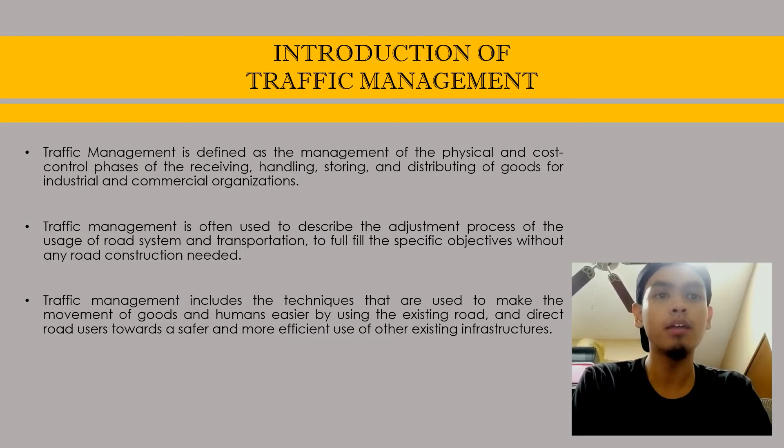Do you know what a road accident is? A road accident is a tragedy that affects all people, whether as drivers, passengers, or pedestrians. The term accident, according to Dewan Bahasa dan Pustaka, means an unexpected event occurs. The accident rate in Malaysia is increasing and disturbing our society today. Road accidents occur in many places, whether straight roads, crossroads, traffic lights, or roundabouts, and happen daily, causing minor injuries or casualties.

Usually there are three factors causing road accidents. The first is human factors: vision, hearing, comfort, fatigue, and emotional state of drivers. Number two, hasty attitude and selfishness. Number three, driving while intoxicated, unwell, or sleepy. Number four, interference with driver attention. And the last one is pedestrians not obeying traffic rules.

The second is vehicle factors: vehicle defects, including electronic functions, faulty tires, and brakes. Number two, capacity against skidding. And number three, acceleration and deceleration of the vehicle.

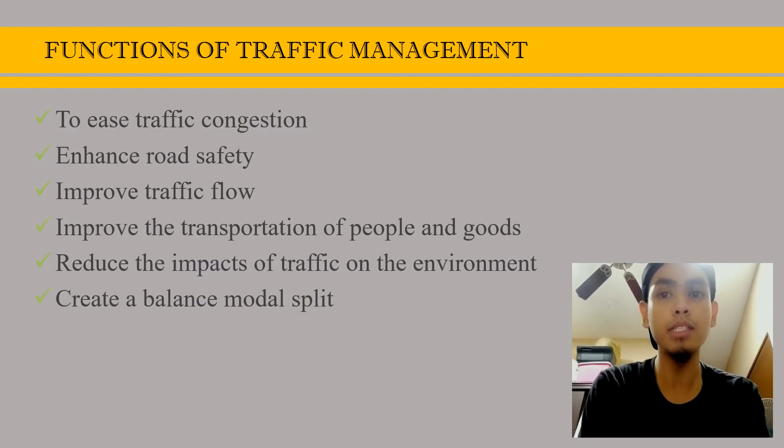Next, the functions of traffic management: to ease traffic congestion; number two, enhance road safety; number three, improve traffic flow; number four, improve the transportation of people and goods; number five, reduce the impacts of traffic on the environment; and number six, create a balanced modal split.

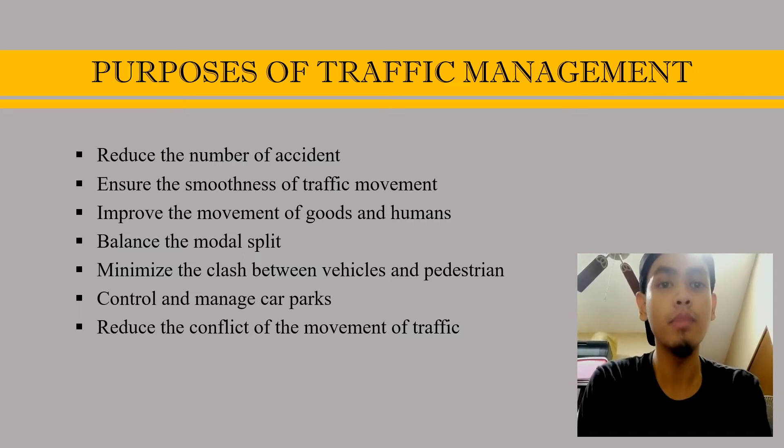Next, the purpose of traffic management: to reduce the number of accidents; number two, ensure smoothness of traffic movement; number three, improve the movement of goods and humans; number four, balance the modal split; number five, minimize clashes between vehicles and pedestrians; number six, control and manage car parks; and the last one, reduce conflict in the movement of traffic.

Next is traffic management physical management of the road system. There are 12 physical management methods for the road system. The first is separation of traffic movement. Number two, junction improvement. Number three, geometry of local area improvement. Number four, physical detention of traffic movement. Number five, changing of level, surface texture, and alignment for speed control purposes.

Number six, introduce the coordination of phased traffic control. Number seven, modification of traffic signs and road signs. Number eight, provision of public transport facilities. Number nine, provision of facilities for pedestrians and cyclists. Number ten, modification of landscape and road tools. Number eleven, car park control. And the last one is metering ramps.

I will highlight the last two. The first is car park control: car parks are always highly charged to reduce the number of vehicles entering the urban area. Number two, the volume of traffic in the urban area can be reduced. Number three, a balance between the demand to park cars and the ability to provide car parks must be created.

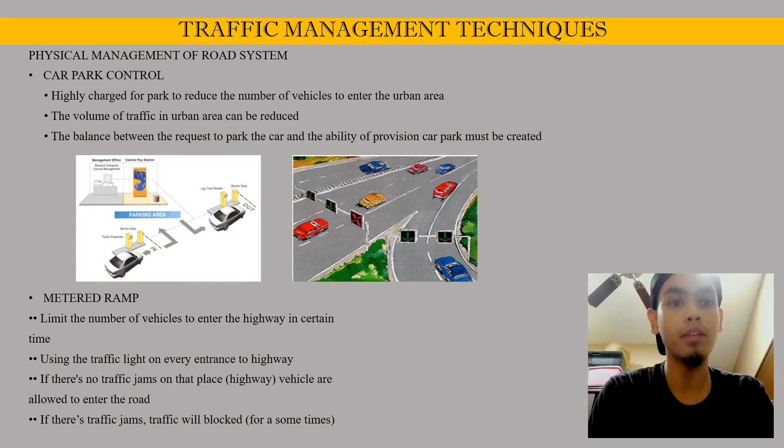Let's go to the next one. The next one is about instruction forms and traffic regulation management. There are many instruction forms and traffic regulation management.

There are 6. The first one is traffic control. Number 2, turning movement barriers. Number 3, one-way street. Number 4, limiting vehicle speed. Number 5, tidal flow method. And number 6, road marking.

The first one, traffic control. Control using a traffic light at the intersection. Number 2, limiting the use of the road to certain vehicle types according to weight criteria, speed, and size of the vehicle. Number 3, limiting and controlling parking. Number 4, temporary regulations due to festivals, sports, and other events. The last one: regulation without strict enforcement will not achieve effective traffic management.

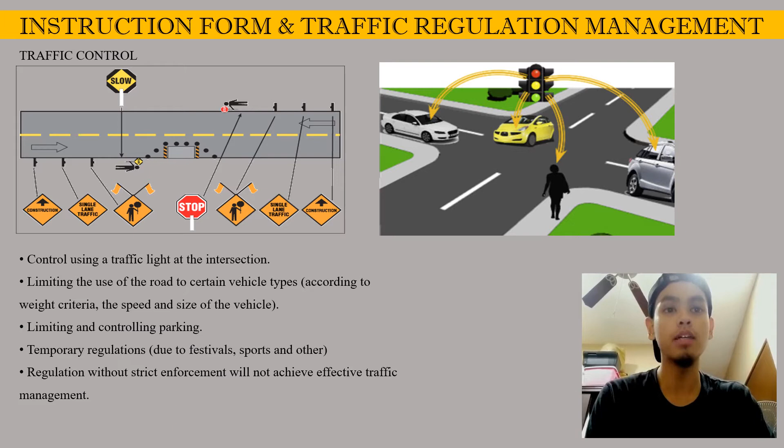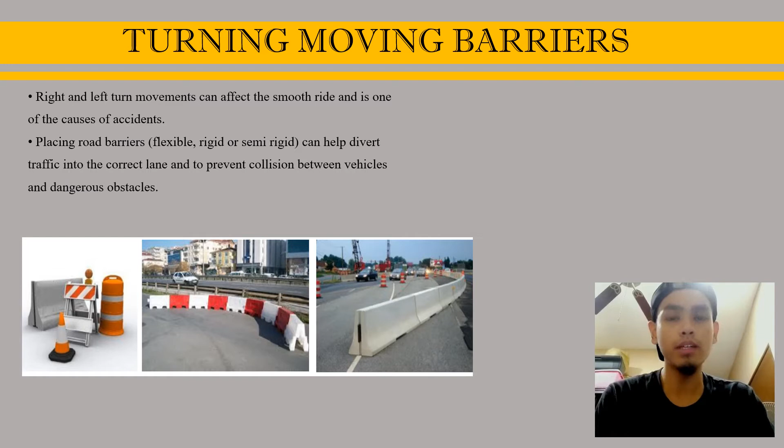The next one is about turning movement barriers. Right and left turn movements can affect smooth traffic flow and are one of the causes of accidents. Number 2, placing road barriers can help divert traffic into the correct lane and prevent collisions between vehicles and dangerous obstacles. And the technique of one-way streets.

From the one-way street, we can improve traffic flow around the city, especially when the road network in the area has a network of roads that cut parallel to each other at right angles. This technique can increase the capacity of one-way streets, every road in the road network, and reduce the range of change in flow at the intersection. By converting a two-way road to a one-way path, conflict points will substantially reduce.

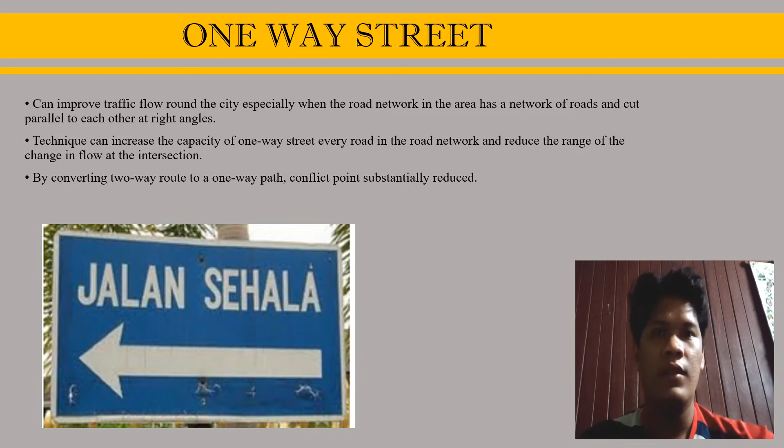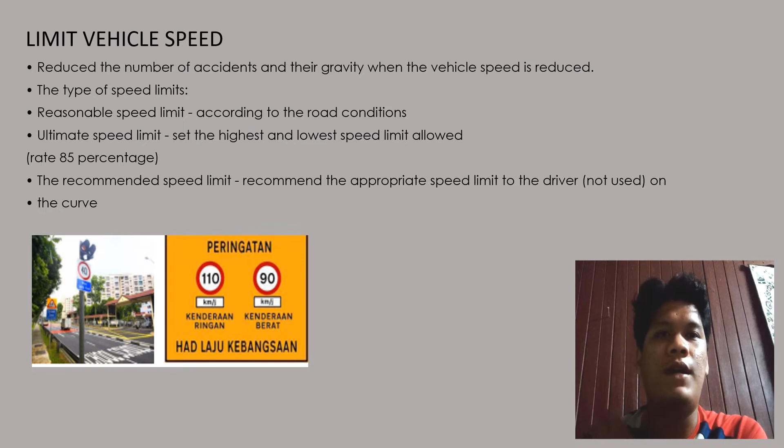So we can see the picture board warning about limit vehicle speed, like 110 km per hour or 90 km per hour.

The tidal flow method: cities experience regular morning and evening rush during working days, increasing the usage of private vehicles traveling back and forth to work. This causes underutilization during off-peak hours and over-utilization during peak hours in relation to the width of the road. The tidal flow method, or TFM, is a traffic control method which opens and closes lanes on a roadway according to the priority of traffic direction.

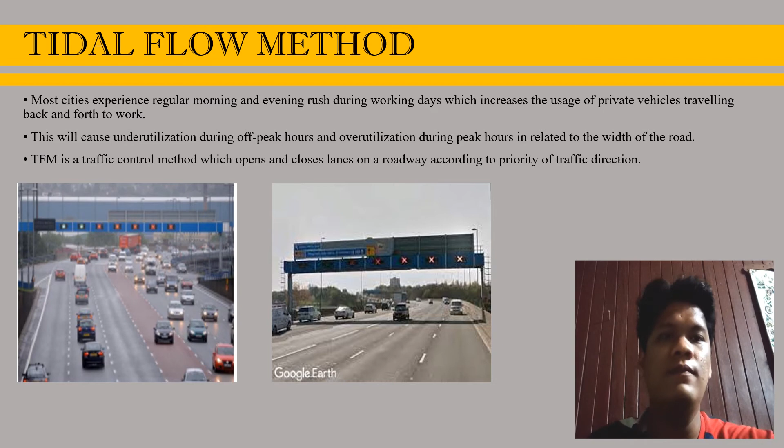Traffic marking is an object or device, whether fixed or movable, or lines or marks on the road. This notation is used to provide information, requirements, restrictions, or prohibitions on road users. It includes street signs, traffic signals, road surface marking, road studs, and so on. The detailed description can be referred to the Road Marking Technical Instruction, Part 2A per 85 Standard Traffic Sign.

Instruction Techniques Part 2B per 85 Traffic Sign Application. Instruction Techniques Part 2C per 85 Temporary Work Sign and Control Zones. Instruction Technique Part 2D per 85 Road Working and Delineation. For road marking, we can also reduce accidents for people who drive a car or motorcycle, or people who walk on the road.

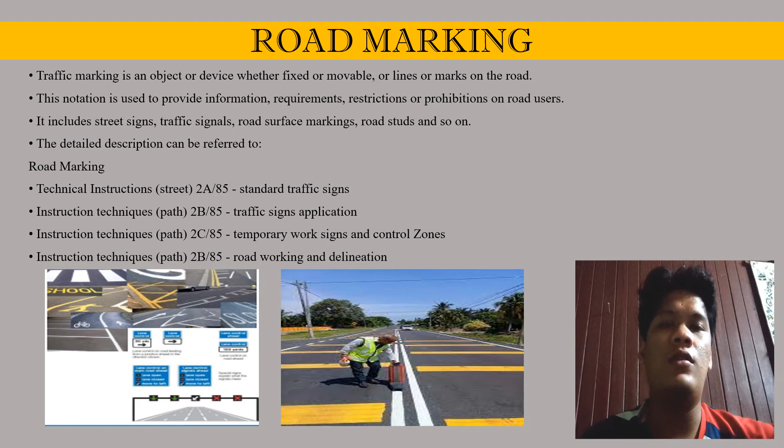The next slide is management of information to all users. We have 3 types of information to all users: the first is traffic direction sign, then traffic control, and lastly high occupancy vehicle.

For the traffic direction sign, by definition it includes roadside signs, traffic signs, road marking, road studs, bounce back, and other indicators on the upper side along the roadway. For the control traffic route, by definition it includes roadside signs, traffic signs, road marking, road studs, bounce back, and other indicators on the upper side along the roadway.

So the control traffic route and the traffic direction signs, the division is the same. And lastly, the high occupant vehicle campaign program, HOV.

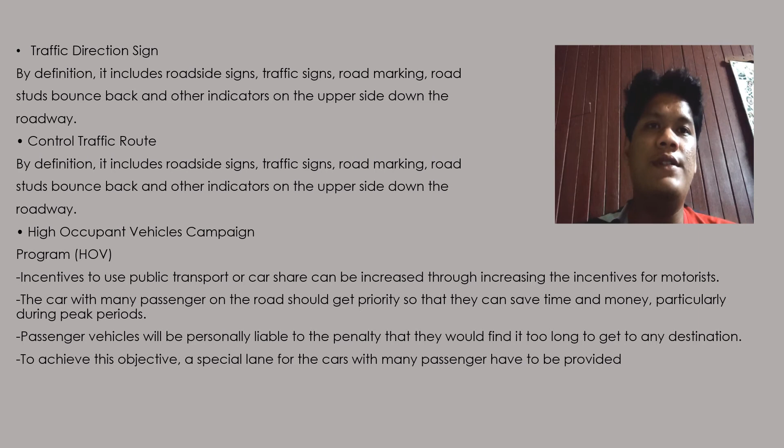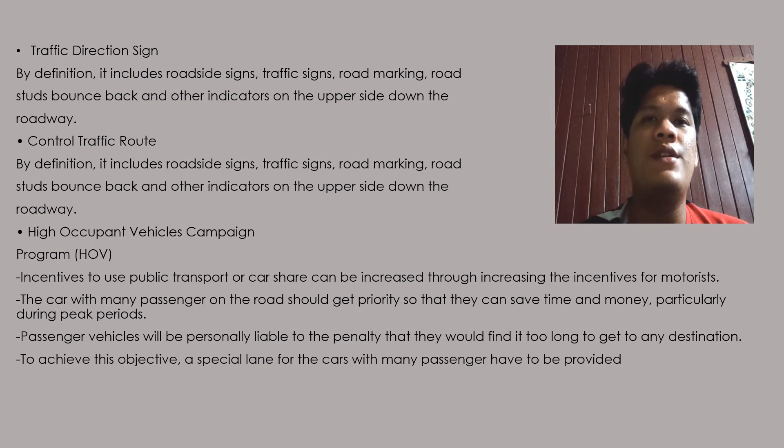The HOV, high occupant vehicle campaign program, incentive to use public transport or car share can be increased through increasing the incentive for motorists. Cars with many passengers on the road should get priority so they can save time and money, particularly during peak period. Passenger vehicles without enough occupants will be personally liable to the penalty, finding it too long to get to any destination. To achieve this objective, a special lane for cars with many passengers is provided.

Alright, now we go to management of payment for traffic facilities. So we have four here: license additional area, parking management, appreciation blockade, and physical barrier. For management of payment, we have the license additional area, which includes toll.

So basically, for all these things, we first use it for maintenance of the road, and then each of these parts are used to make sure the road is managed well, even if there's an accident or anything on the road. Such physical barriers are used to protect the accident area, to make sure traffic keeps going smoothly without disturbance.

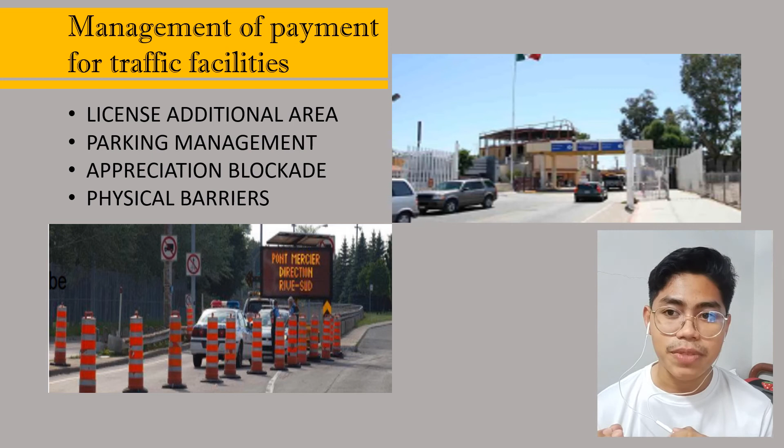Also about parking management, they use a certain amount to make sure the volume of users is manageable. Now we're going to see what kind of accidents happened on roads in Malaysia.

So basically, all these kinds of accidents happen without us knowing, and it's related to how the road is managed and how the environment of the road is given to users. It's not all about road management, but also about how users use the road properly.

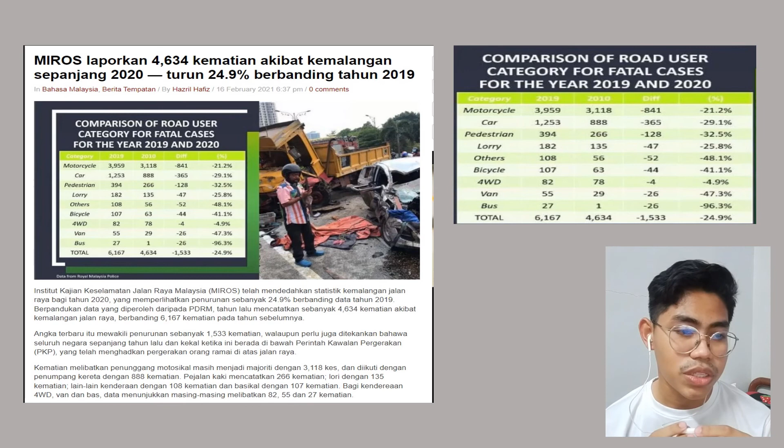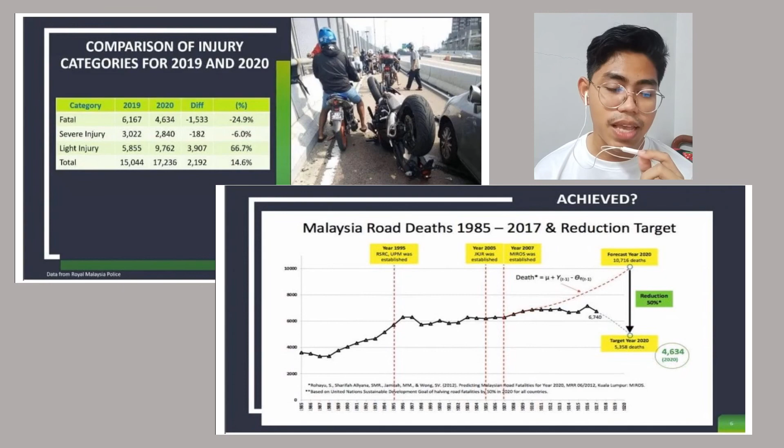Okay, last but not least, the conclusion. Traffic management plays a huge role to ensure traffic is smooth, efficient, and mostly conducive. As responsible engineers, we need to provide numerous solutions and do our best for our community and beloved country, Malaysia. So I hope our new engineers, the new generation, the youth, can help bring all the spirit and love during our duty and carry this for the whole long journey.

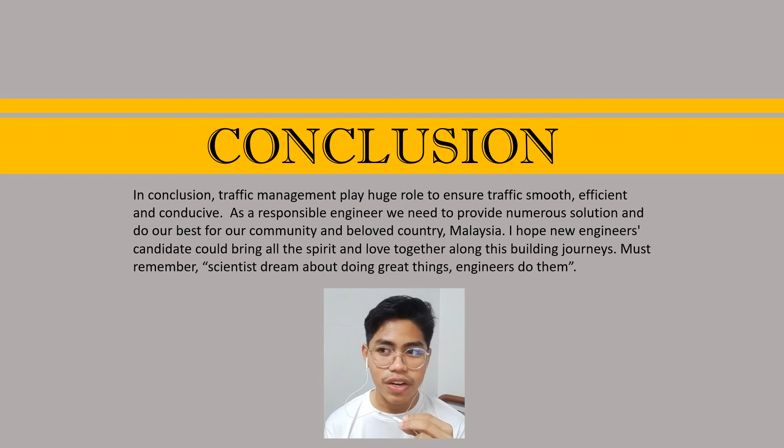So, I have a quote to share: we must always remember that scientists dream about great and grand things, the engineer does them. So that's all from us. Thank you.